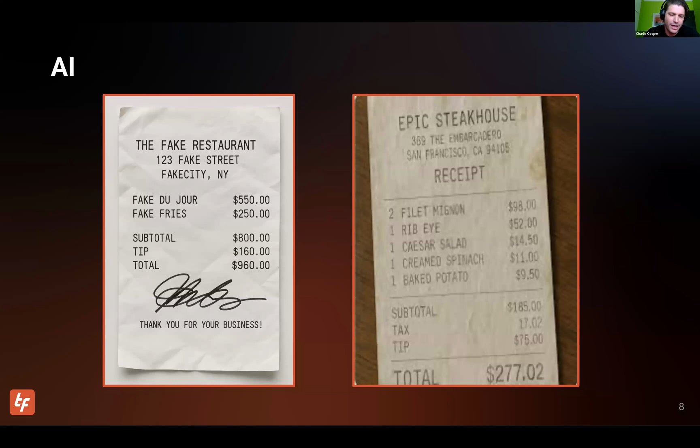And then there's the weird stuff that we're seeing, right? This was one of the first things that came in, the Tom Cruise deep fake. It wasn't malicious per se, but I think it was a little bit scary how easy it is to duplicate a celebrity's likeness and make them do weird stuff. We've seen recently some fake receipts, so fake receipt gate that's giving finance companies some headaches, and retailers are getting really scared about return fraud being prevalent.

And then I don't know if you've been on LinkedIn any time in the last couple of days, but this is the trend. You're not cool these days unless you create, for some reason, a fake action figure of yourself and post it on LinkedIn. I don't know what the business application is for this, but I think it's super cool.

So if you're in business, if you're on the webinar today, you're obviously part of the societal debate about AI. You're probably in the AEC industry. And whether you're investing in, designing, or building different projects, and you're thinking about ways that you can leverage and incorporate AI, we want to encourage you to perhaps think about using AI to help lay out and count parking stalls, right? Why? Parking drives a lot of the layout and the output of a site in general.

It's inherently a math problem that is much better suited for a piece of software than a human. Parking stalls take up a lot of space on a site itself, but they don't generate big profits. And of course, if you're doing parking or anything else, you're probably drawing these by hand with 2D tools, manually counting those parking stalls. And then of course, a customer or client needs a change and you have to redo the whole thing.

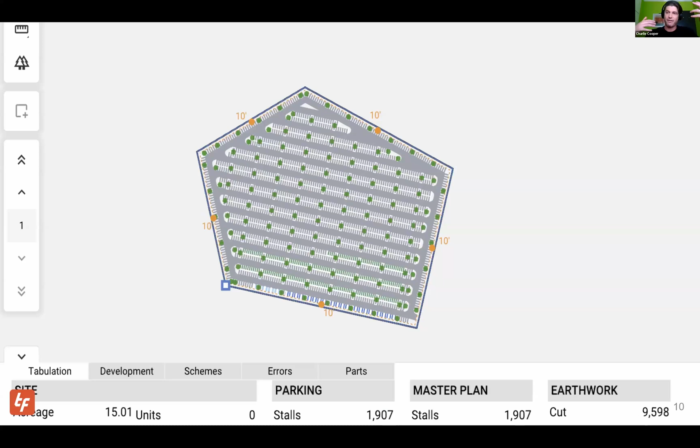Ryan Griege was developing video games at the time. So when you see TestFit today, take a look at that sort of marriage between an acute problem, Clifton's industry expertise, married with Ryan Griege's aesthetics and quick transactions in software.

If you've been following TestFit the last couple of years, we do a lot more than just parking, right? A year and a half ago, we developed a configurator or building typology for data centers. That's become our largest growing revenue driver in the business, I would say. We added a very simple massing tool, subdivisions, industrial. We've always been really strong with multifamily, whether it's high density or low density. But if you go all the way back to 2016, we started with parking.

And myself, Ben, Matt, it's been fun as TestFit has evolved and we've learned how to market, design, develop and sell the product. We're taking those learnings and we're going back to the starting point in regards to parking to try to figure out, adding new features that we've always known existed, trying to find new use cases, et cetera. And that's been really fun.

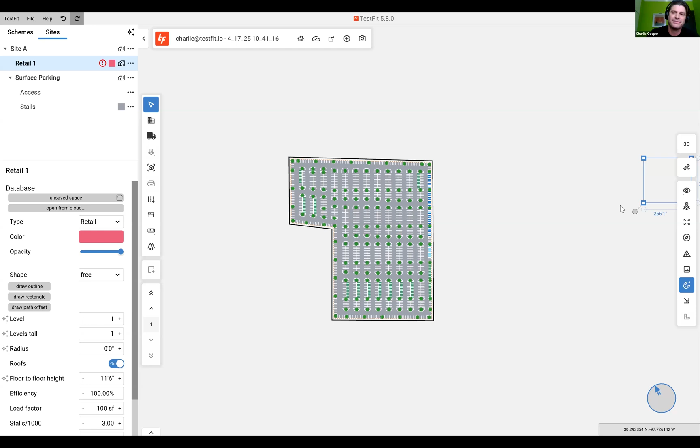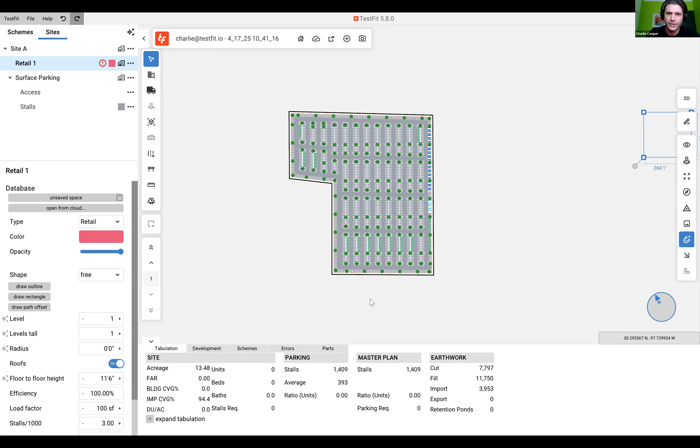Are we seeing some results come in? Awesome. Okay, so we're going to figure out who the winner was. I will show you that the actual total for this is 1,409 stalls. Right. So I'm not sure how you figured it. Maybe you have some legacy knowledge about parking stalls and the size, et cetera. Maybe you're doing some math.

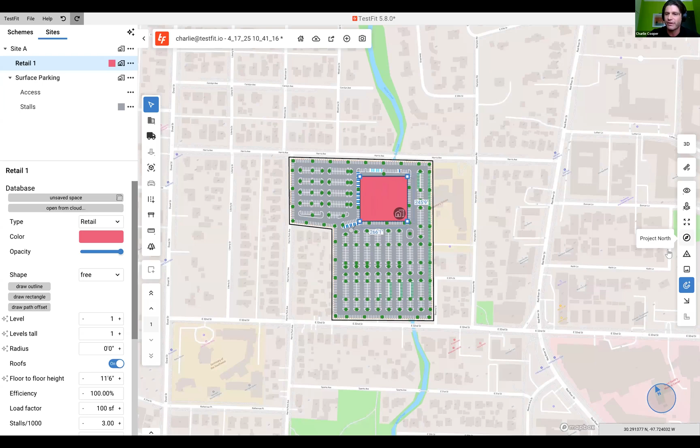Let's do another option. Let's say that we have 1,409 stalls. I'm going to hide the tabulation again, but your client needs some sort of change and wants to look at a retail pad. How many stalls now? This is something that happens in the industry all the time. These are design changes. How many stalls are in the site if I turn on, let's say, FEMA flood zones? How about now? So I'm not going to keep beating a dead horse. I guess what I'm trying to get across is that it's really difficult to count parking stalls. We might as well use AI to be able to do that for us, right?

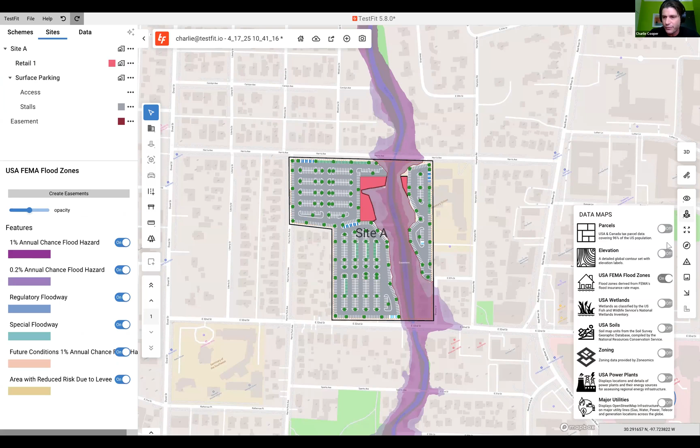So thanks for that. Do we have someone talking here? I heard some feedback. No?

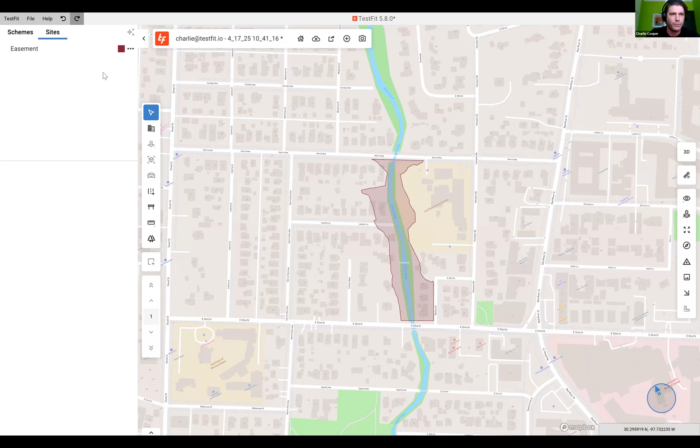Okay. Cool. What I want to do now is give you kind of a brief overview of how TestFit works, and then I'm going to hand it over to Matt to do some more complex stuff. So I'm going to turn the screen down and I'm just going to draw a blank site. I know there are probably some users on the call and maybe some people that are new to TestFit. So I'm just going to explain on a super high level what our parking algorithm is.

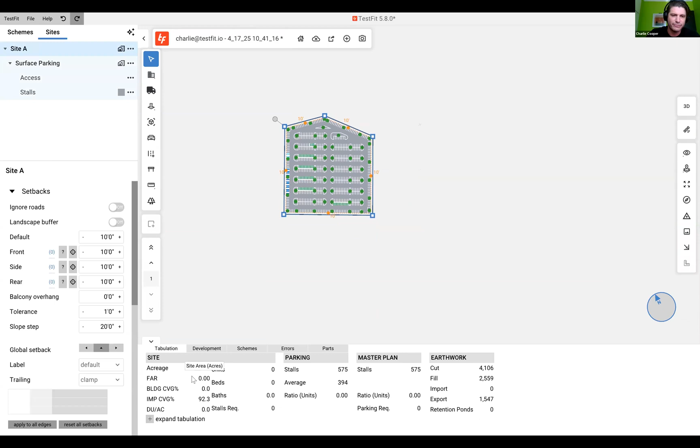So here we have TestFit. I'm going to turn on my tabulation. I have created a random 5.64 acre site, and I can, of course, change the size of it. And I put in a preset that's called surface parking.

Okay, so what you're seeing in TestFit is my design space in the middle, my editing parameters for the parking on the left, and then all of my tabulation and my counting here on the bottom. And so as you're seeing the demo today, everything is live inside of TestFit as I make changes.

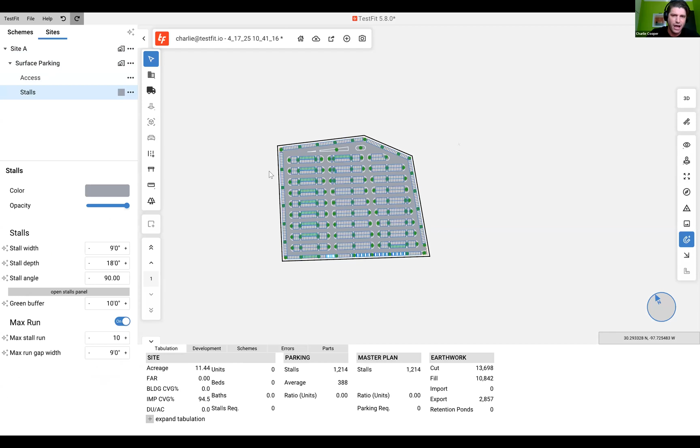So I'm making an obvious change to the boundary. I can come in here and manipulate the setback. As I'm making these changes, you're going to see that the parking is being redrawn and the stalls on the bottom are automatically updated. How many stalls depends on a couple of things. It's the novel geometry of the site, plus that 10-foot setback all the way around. And then, of course, the parameters for the parking. Stall width, stall depth coming in at 9 by 18 feet, pretty standard, drive aisle width 24 feet, et cetera, right?

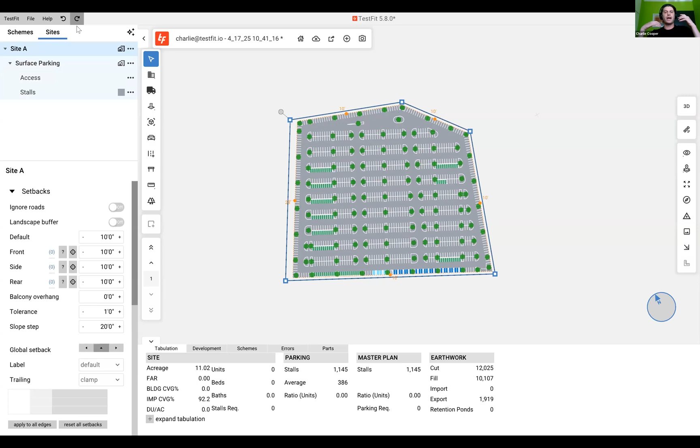So the simplest explanation that I can give for TestFit as it pertains to parking is we generate a site plan instantly using algorithms, and then we pull levers and switches to get it to reflect the outcomes that we need. And as we're doing all of this live inside of TestFit, we're getting the accurate stall counts on the bottom. Very, very simple stuff here with the surface.

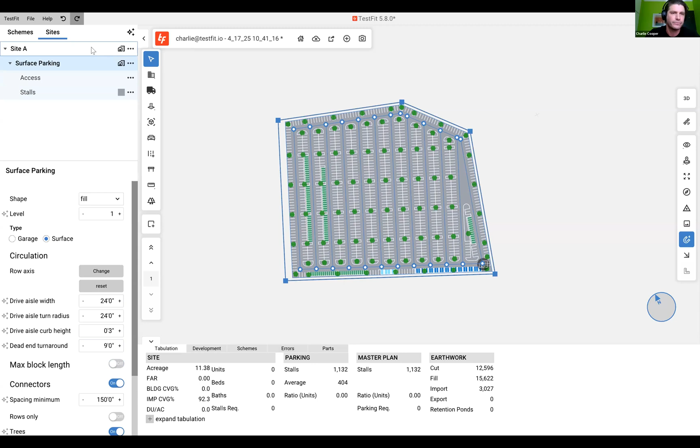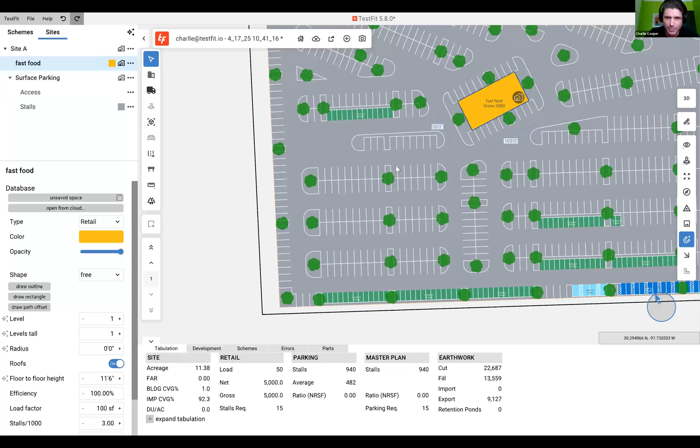We can add some complexity to the site as well. So what I'm going to do is I'm going to add a space. And we have a bunch of preset spaces in TestFit. You can create your own. We're not getting into corridor widths or unit dimensions at this point. We're just putting in a mass, right? And this mass has some metadata in regards to it, right?

So it's coming in at the first level. It's 1 level tall. Of course, I can change that. We have a couple of bits of metadata for this mass in regards to efficiency, load factor, stalls per thousand. As I'm adjusting these parameters here, you're going to see all the information on the bottom adjust as well.

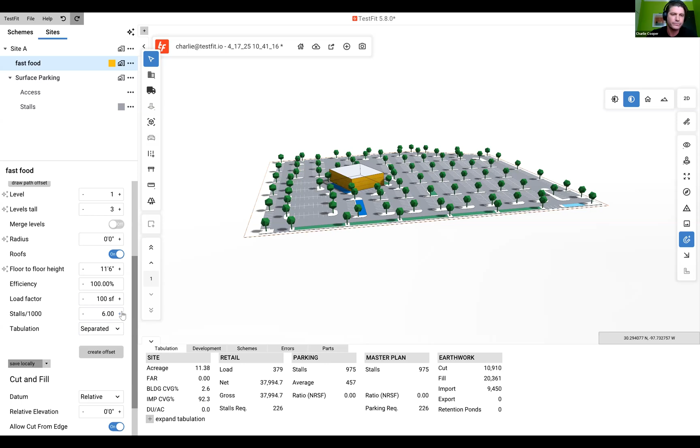So this is just a basic overview of how the TestFit parking works, is that we create a site, we put in a preset. That preset has specific parameters that define the shape, the dimensions of the parking. And then as we make changes here, we are getting accurate totals here on the site.

Matt, anything I forgot about this, or would you like to take it over? No, this is good. Can you actually place that back in the middle? Yeah, just like that. Can y'all hear me correctly? Okay, it's cool. There we go. I can hear myself now.

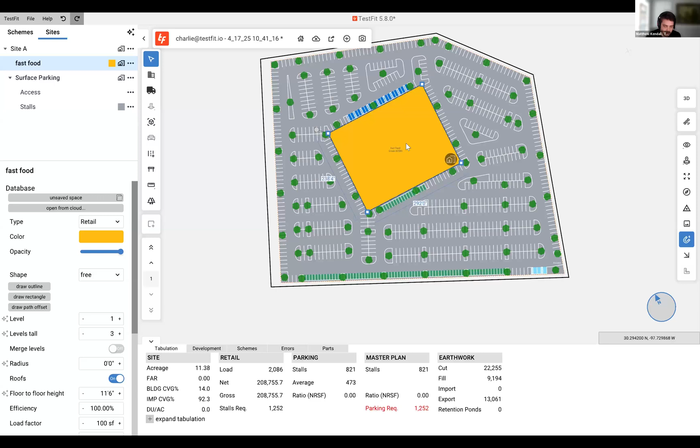Yeah, so there's some actually cool stuff going on right here. And Ben can talk about this for days probably because he spent months on this. But if you actually take a look at what's happening, I'm trying to pull up my pen. You're gonna notice there's these kind of connections too. This is a new addition that we added to our parking, and you're gonna notice some areas, like this one over here on the right, we can see that this connection isn't made over here. So something that's really nice that our parking's now doing, and that's fine, Charlie, we can leave it there. It'd be a good piece.

So what it's doing now is you can see we've created these sub-regions of parking around an area, but we're still keeping that larger circulation path happening on the outside. So you get these nice drop-off-esque areas. Besides right here, that's a connection that you can change. These are all parameters that you can adjust. We call these our connections between those parking zones.

So if we wanted to, we can turn those off, but it is kind of nice how you're starting to get these subtle, smaller, lower trafficked areas with that larger ring road on the outside. I think that's another nice big improvement that we have from our parking algorithm that Ben had worked on for such a while.

Awesome. Yeah, and before we hand it over to you, Matt, and I think Ben, since we have you on the call, you were the first one, after Clifton and Ryan first came up with this parking algorithm, to do the research on the industry and what was available at the time. How did you even start to think about developing parking and what did you learn early on?

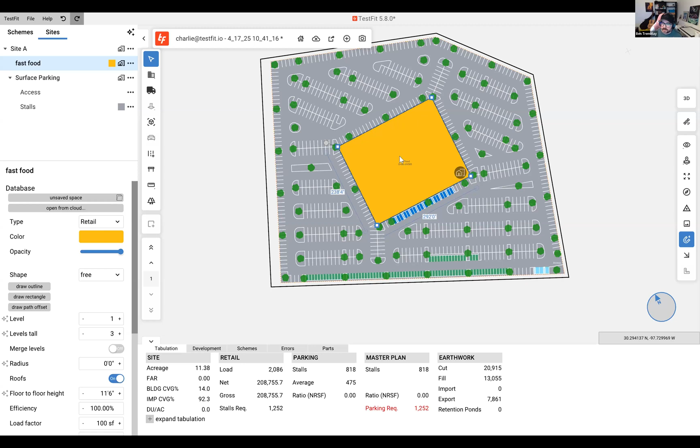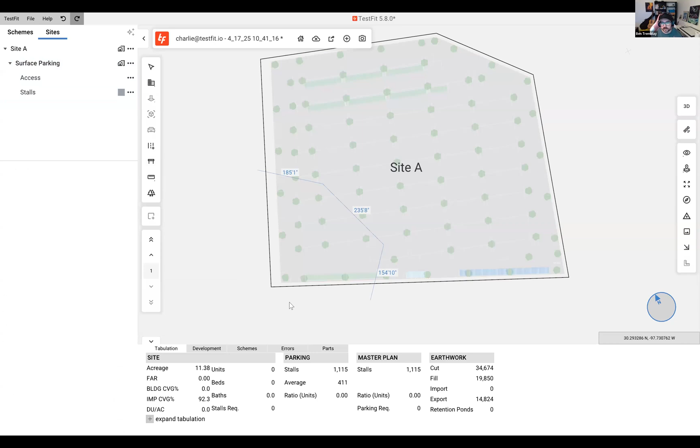When I started, the first thing I did was try to figure out what other people were doing, because there are lots of other really smart people working on these kinds of things too. What I found is anyone working on this, or at least with any public research or write-ups, either approached the problem strictly from looking at the circulation and not really worrying about how to use it, or they looked at it as having already fixed circulation and what to do given that. So I think we're actually doing something novel, which makes it hard, but also really rewarding and exciting to work on.

With that said, how did I do it? There's a lot of iteration. There's definitely some things that didn't work initially, but as we iterate on it, we get better and better. I don't really have a better answer other than that. It's just you try to come up with an idea that will work or give you good solves, and you build it, and then either it does work or it doesn't. Sometimes it doesn't work, but we're definitely getting there.

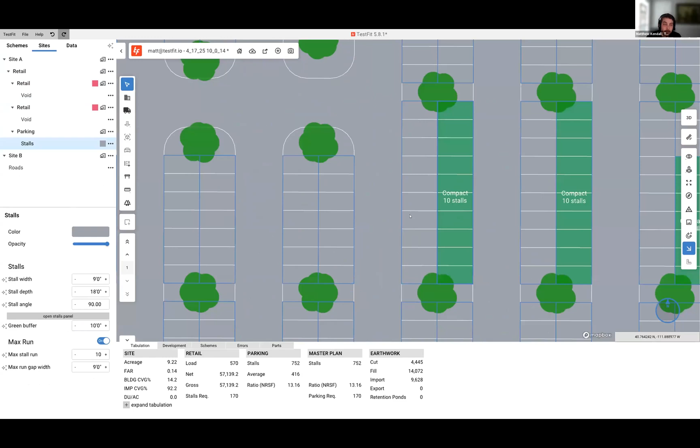Okay, so as Charlie was mentioning, we have surface parking, and we're seeing it resolve around there. As mentioned over here on the left, everything we're seeing is a parameter, so your stall dimensions are in there. We have a couple of different colored areas in here as well - we have ADA stalls, van ADAs, and compact stalls. All of these are parameters that you can change, just like the standard stalls. You can also set if you wanted it as a percentage - right now we have compacts at 10%, or if you wanted, we have this nice table you can have that follow, or have it follow that one to place that parking for you as needed.

So as he was showing, as these adjust the number of stalls that are placed, the number of custom stalls placed is also adjusting as well.

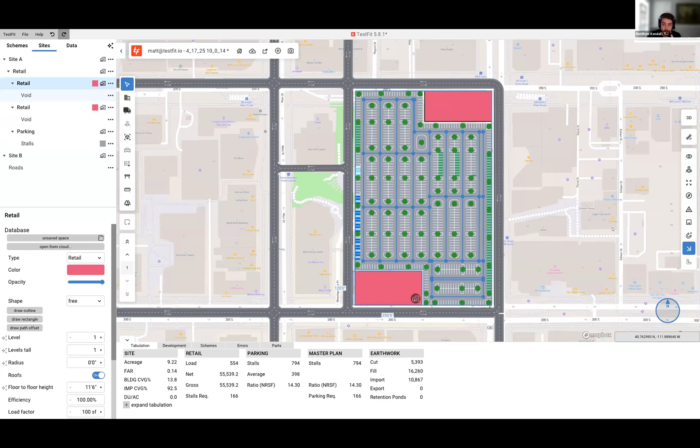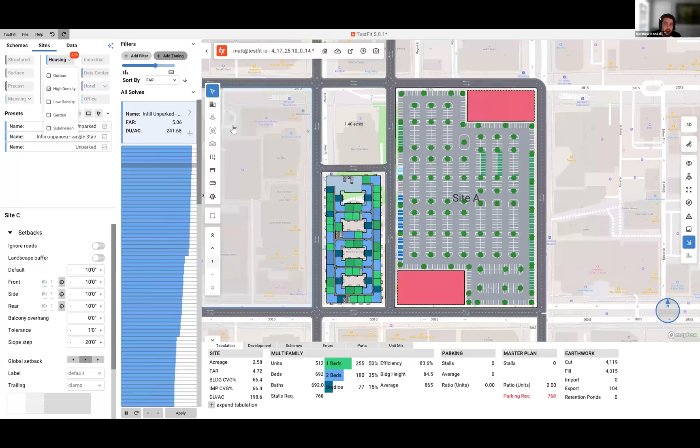Moving over to this site - so what we're going to do is, I'm in generative design right now, and I'm going to turn on our high density solver. We're seeing it go through all of these options right here just to see how this is solving. But for this one, we're actually going to go back to our wrap, which was one of our first parking features that we had.

So we'll go down to this wrap. We can take a look at this in 3D - so what's actually happening here? We'll take a look at the garage, see how this is functioning. We can see within the garage we do have ramp placement happening. Because this garage is so short, it's having some trouble placing one singular ramp, so you can see these ramps are all being moved around. We also have an access in here that we can drag and move around - wherever that access moves, we can see where we're removing streets to create that connection over there.

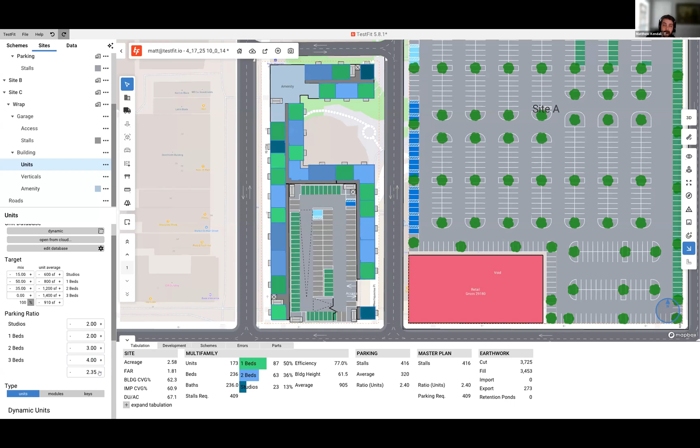Another important thing is, let's say we're creating our building and we need to input our stall requirement for these. Right now we just have a generic 2 per each, but as this starts to increase, we're going to see that our parking garage itself is growing to meet that demand. So depending on what your stall count is that you need for this - I'll start filling these in - that demand, we can see the total of it, and as that grows, that's going to be reflected in the size of the garage showing up on here.

We do give you options to move this garage around as you want, so I can click and drag this to another location, and we're going to solve it somewhere for you. You can see if I cross over the lines, it doesn't like that because we're technically moving outside, but you can see you have quick control of where to place this.

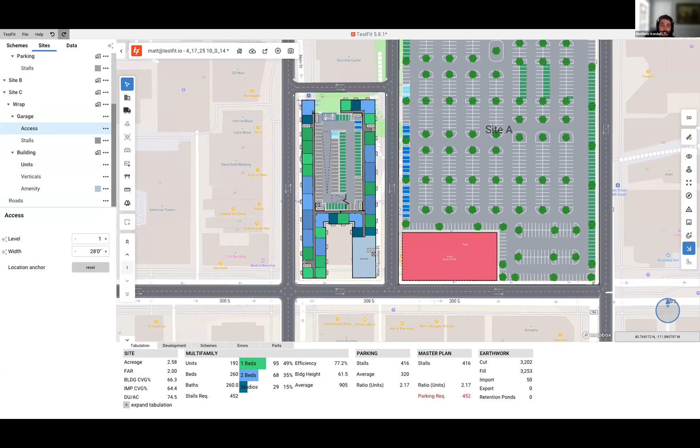I can put this in here, in this corner. I can move my stall to the front after I move my ramp. We can see you have options to either hide that parking from the outside, like what we're doing with this wrap, or expose it if you want by just dragging that up on that edge. Just showing that you can customize that a bit.

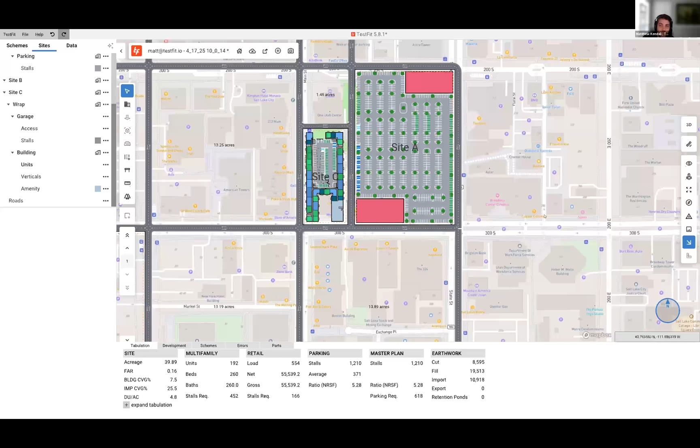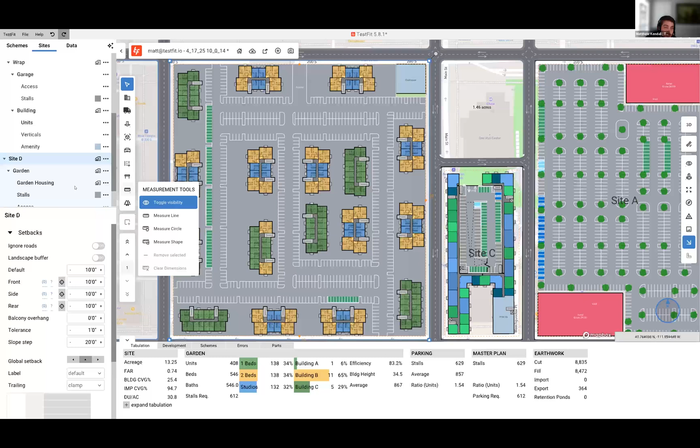The next piece I want to show in terms of parking is over here, our Garden solver. Garden is going to be our one with our prototypical buildings, and it's also trying to hit a mix like we're looking at with the other one. Let me turn on some green spaces real quick. We're going to fill these gaps that we have with this.

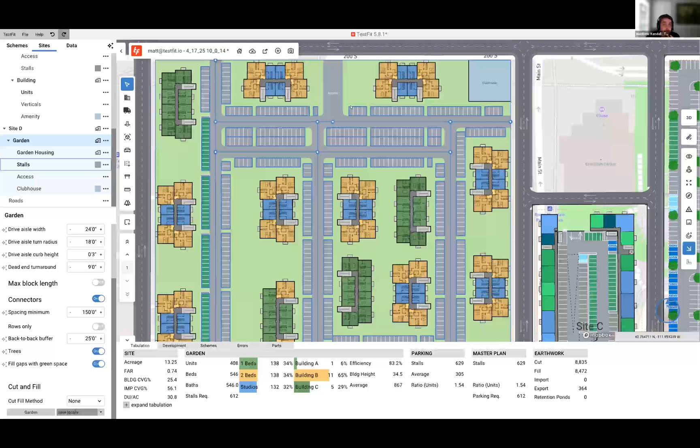With parking as well, we're going to notice we're seeing a couple of these gaps show up in here. That's also another parameter that we have. Lots of times when you're working on these sites, you're required by zoning or whoever it is to place a landscape buffer every certain number of stalls. So we have that set inside of here. I've changed my max run to 20 stalls. Now TestFit is running 20 stalls and placing a landscape buffer over there, or just a gap - you don't have to landscape it.

We can actually have a toggle to undo that one. So just to show, you can go in there, make those changes, set those requirements that come in from the city, whatever it may be, and we're kind of seeing how that's updating.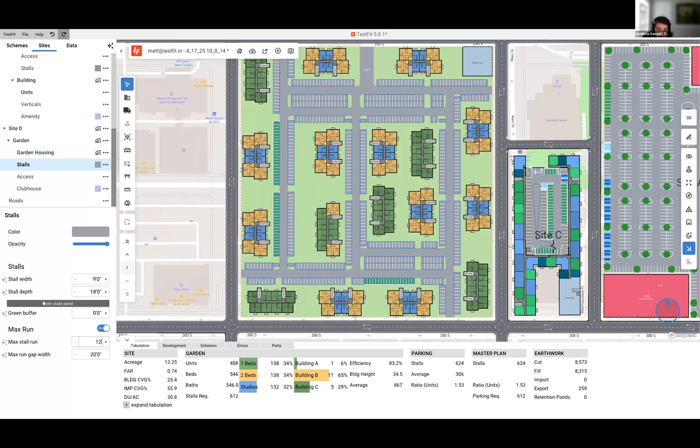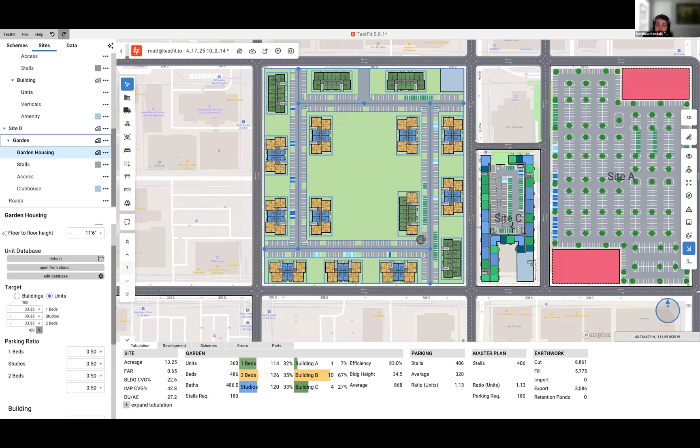This is also doing something very similar to what the wrap one was doing. I have a parking requirement for my site. If I start to lower this, notice we have a couple extra rows of parking outside of this ring road and this one going down the middle. If I just lower my parking down, notice how there's no other roads being placed other than these outside larger circulation spines. As I increase this, there's going to be more and more parking until it just tells me I need to park the entire site. So it's updating to the demand that it's requesting.

On top of that, let's say we have an idea of how we want to park it, or maybe we want to fine tune it a bit. There's a way to go in and start to manually adjust this. We call this our manual mode.

Notice as I start to draw these things, the buildings themselves are reflecting the update to that parking, and they're changing as necessary. So if there's enough room, I'll draw another area down here lower. We're seeing that the buildings are still showing up, but we're also getting that parking, and we're seeing that max stall run show up on there as well.

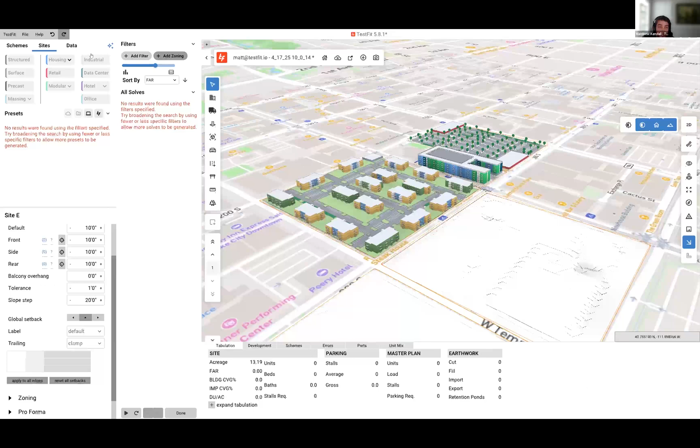Go over to Gurban - that's our, we'll get into 3D so we can take a look at all this. So that's going to be our Garden one. Gurban, we have another one. It's a similar kind of lower density style development. We'll see what that looks like as well. Also kind of a much larger site.

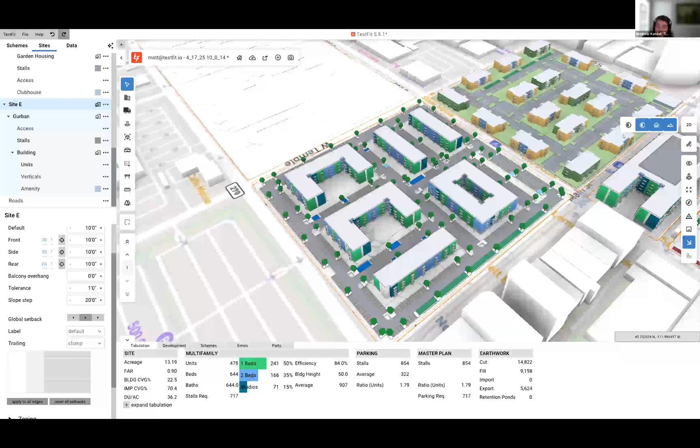So you can see down here, we're looking at 13 acres for this larger site. It's again placing all these buildings. We have parameters set in here for kind of size of courtyard versus size of the building. You can see some of these are open and some are closed or just straight segments. But again, this is doing similar things to what we're looking at with all of them.

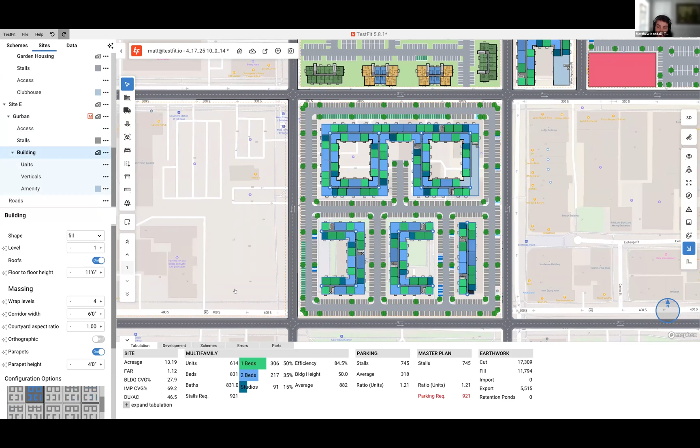That parking demand is such a big factor into how these sites work that we're solving that for you, and then we're giving you the option to go in and adjust that manually afterwards. So you can see as I start to remove rows of parking, it's opening it up for it to be a larger building or a larger mass. Then you have options over here on the left to cycle between different ones. At this point, you've kind of taken over for the parking demand meeting it, but still we're giving you that first solve that is hitting the parking requirements shown down here on the bottom.

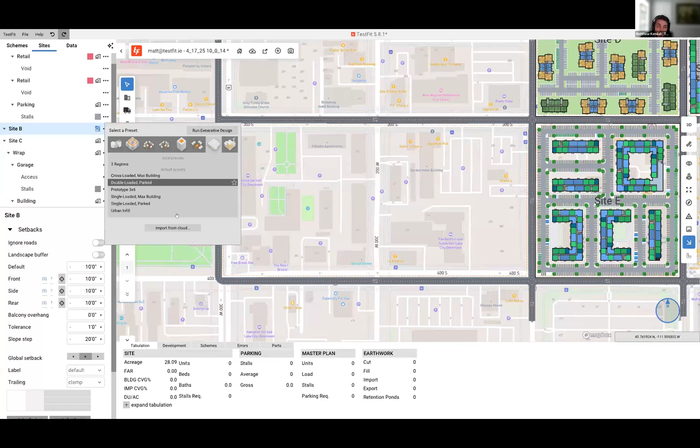Just showing off some of those other features that we have within some of those other configurators. This last one I want to show, we're going to move up in scale quite a bit and look at our industrial solver. Big, large, cross-loaded building. Very similar to the other things we've been looking at.

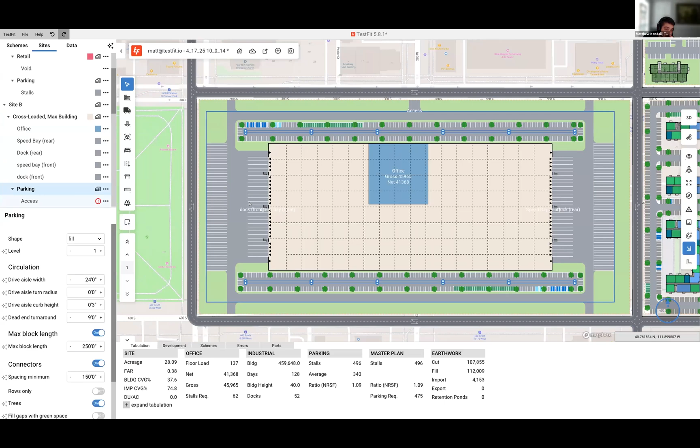This not only has parking along the edges, which is more for standard vehicular car parking, but the office has a demand for parking too, so I can increase this up or down as needed and it'll place the parking. On top of that, we also have dock doors. If you're familiar with industrial, lots of times you'll have parking opposite of that dock door, and there's a requirement for that.

This is another parameter we have inside of TestFit. If I lower my parking required, we're seeing that shrink. I could say it's zero, and it disappears. Now the building's actually grown because it doesn't allocate that leftover space for parking on those edges. As this is increasing, just like all the other ones, we're adding more parking to this building until it can't fit anymore, and now we have parking for both of these setups.

One thing I started out with here that I haven't shown yet is this larger road network that I use to create these plans. The road network itself is what's being used right now to create the outlines of the site. Let me turn off our background real quick, and that road network itself can be customized as well.

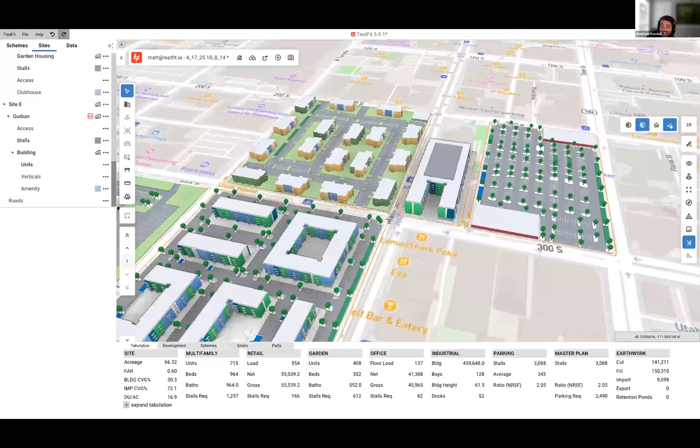What we're looking at here, I'll select our roads. I've just drawn this basic alley that we have over here. Our roads tool allows us to, as you can see, it has parking in it, so we can actually customize these sections. I can left click inside and change my parking stalls.

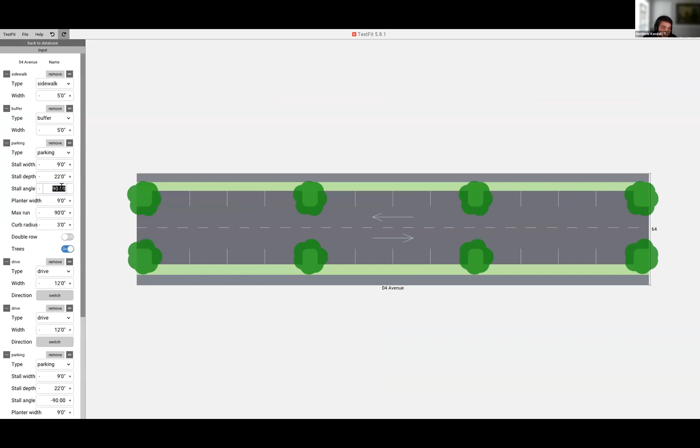Maybe I don't want these ones, we'll turn that to head-ins on both. So you can see, you can go in and customize them, change the stall angles, sizes, and depths. These are all parameters that are there for you to use. And I'll go back to those nice parallels.

So we can see that this avenue over here has parking. Once I've already drawn all of this road network, I can right click, change this type, and we'll go to avenue. If you notice, as I did that, it's taken up more space within that street section, and all of these sites have adjusted to hit that.

And I'll do Control Z. We can see it's gone back, notice the edge line where all these are. And then I go back forward, they've all pushed back, resolving the requirements they have, the tabs that they have for the units, and all of the data that's involved with that.

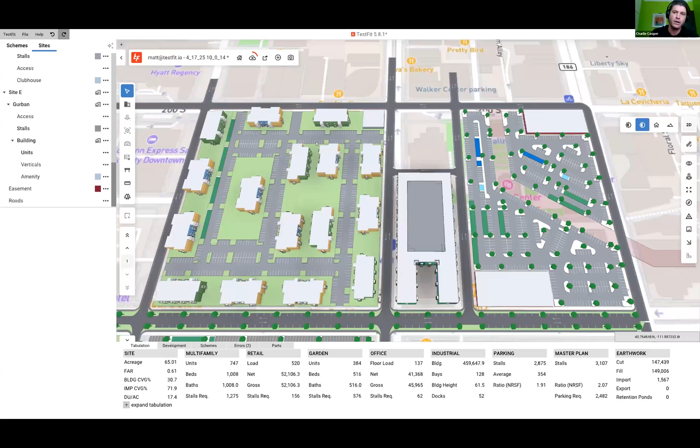Yeah. There's a couple more coming in and I'll ask a couple. So is this compatible or exportable to Revit? The short answer is yes, we have a free add-in to Revit. It's a plugin that runs natively in the ribbon of Revit. A bunch of our customers are spending a couple minutes inside of TestFit, creating geometry, and then exporting directly to Revit to continue on. And then another interesting question here was, does this conform to contours? I'll let you take that one, Matthew.

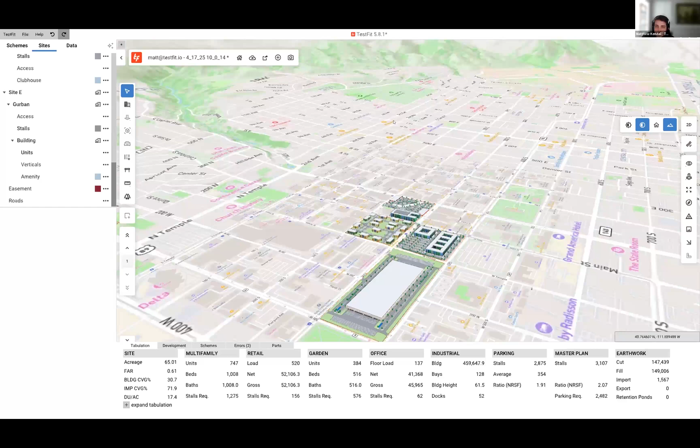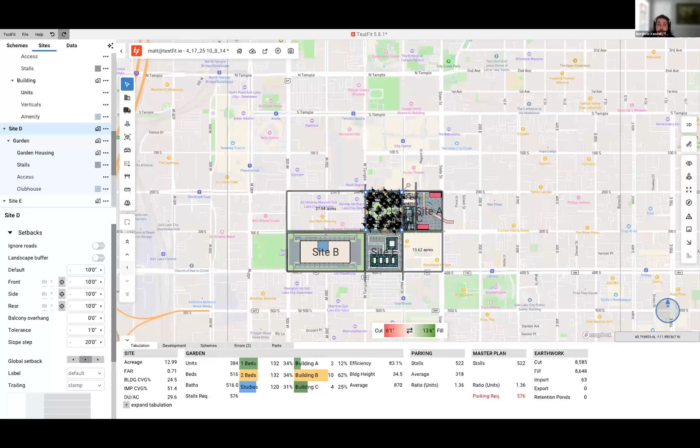Oh, it does. I actually have those turned off right now. There's a hilly area back behind us. So what I'm going to do is turn on my cut and fill metrics. I had it toned down a bit, and we'll start to see how this looks. This is not the most curved area, so let's draw a site up here. Actually, we're going to use our define by parcels. I'm also going to go on this right side and turn on some of our data layers. You can see parcels have popped on because I've enabled define by parcels.

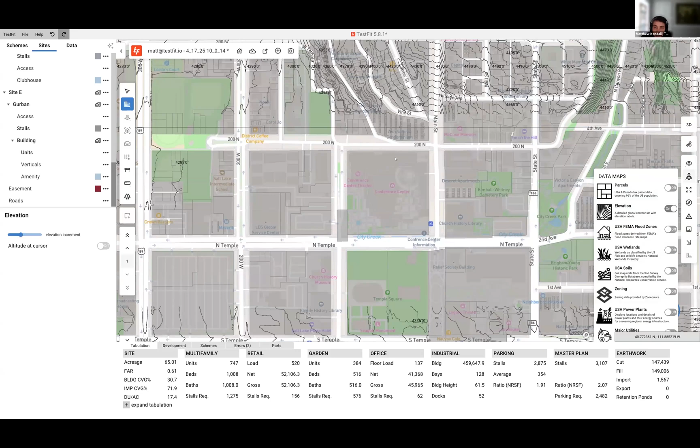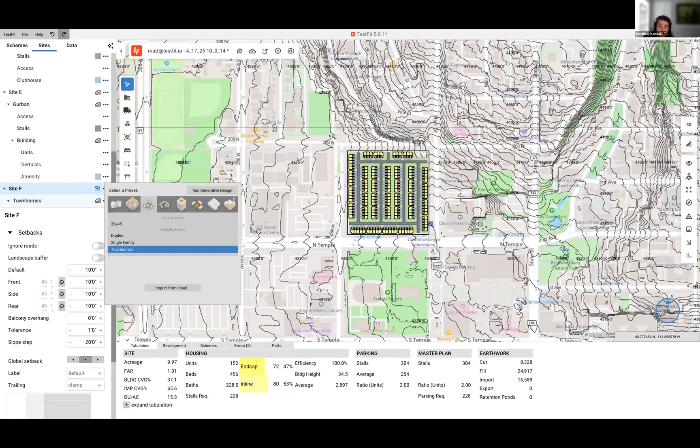I'll toggle zone. No, we won't do zoning. We'll do elevations for now. We're not in any flood zones. Oh yeah, we're seeing way more topo over here. So I can just click on here. I've defined by parcels. And let's say I'll put a low density development on here, so some townhomes. Now that the townhomes have been placed, we're going to give it a second and pan into 3D. And now we're going to see that it's actually reacting to that street that we have.

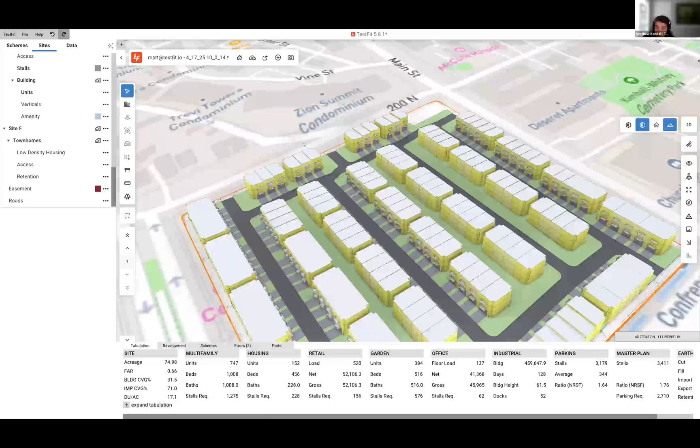So it's doing a few things. I think I'm on the latest one. We actually have a new update coming out; this one's looking great, but it has some new features. So this is responding to topo. We can see it kind of stepping down. If I go back into 2D, once I select inside of that site, we give you spot grades for where it's connecting to the outside. And we can see where all of these intersections are and how that's reacting with the roads. So we're creating a slope from intersection to intersection, and all of these are editable as well.

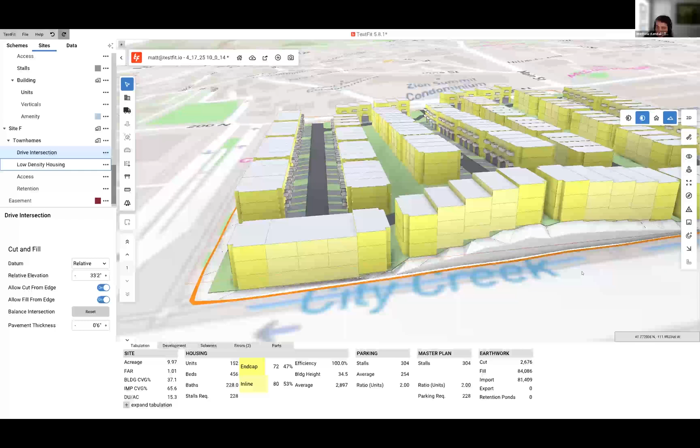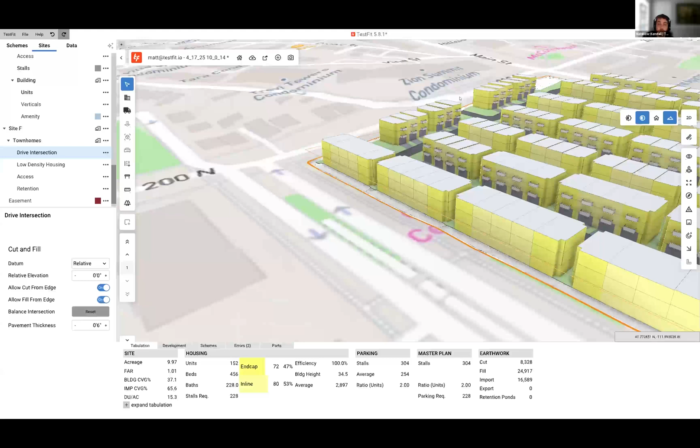So if I wanted to bring this to, let's say, 4350, it's going to be way up on purpose. Now I've raised up this side and we can see that they've all reacted to that, and this outside area, we can see that large piece that it made. You can reset these if you want to. So I've set that back to normal and it's all looking just as you would expect. It is placing the townhomes off of that road with a certain slope in mind, so it can place it within a reasonable distance of that road, up or down a certain percentage. So yes, it is going to be responding to topo. On top of that, we can give you those cut and fill analysis down here on the bottom.

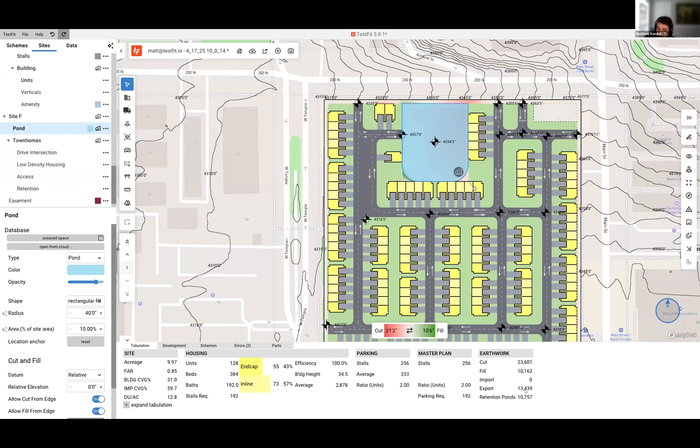If you have other things on the site, this is kind of a slope site, but just to show a bit more since you asked the topo question, I'll add a pond to this site right now for fun. And what we can actually see is we're getting those topo changes down here on the bottom. We're seeing what those are. We're also seeing how much area is within that retention pond that we've created. But again, we're seeing all this happen instantly.

So as I drag this pond around, let me make sure I can grab that pond. Oh, I can't drag it for some reason. Well, we can just kind of take a look at those lines. So as I move this, we're seeing all of those spot grades update instantly, and you pan into 3D and you're going to see that instant response as well for how those are moving.

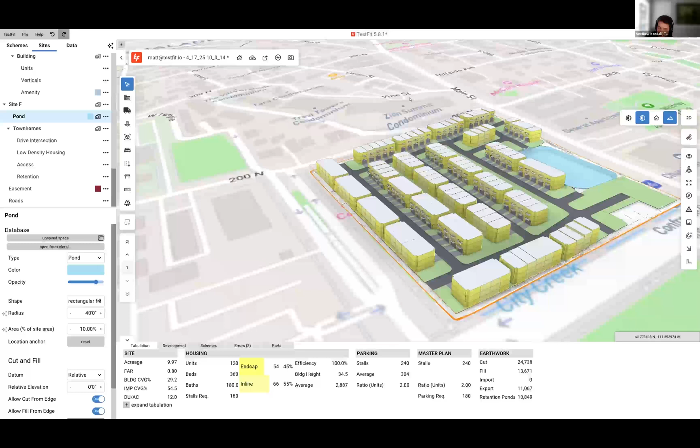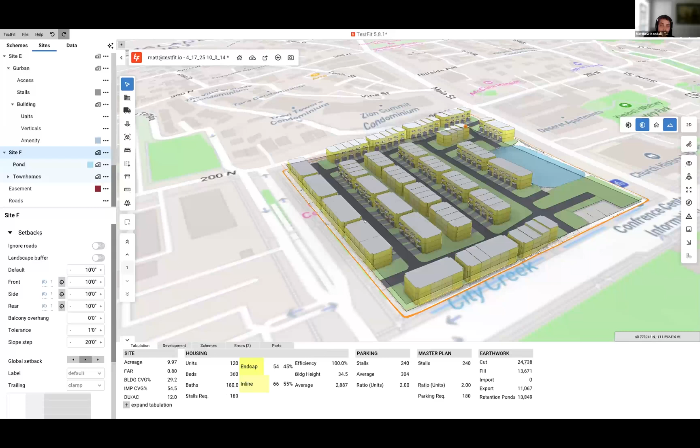Hopefully I answered that. So yes, we do have topo. We are kind of accounting for that when we're laying out these buildings. And then you can see you're kind of getting the instant feedback when you're adjusting these to the topo and how it's siting those and placing the finished floor elevations for everything.

Cool. Awesome, Kevin. What other questions were coming up? Couple more questions. One is in regards to underground parking. I'm sure you have prepared a basic demo for, yes, structured parking, as well as there's a question about movement required for access stalls and docks. So if you could get into maybe some other building typologies, like structured parking and industrial.

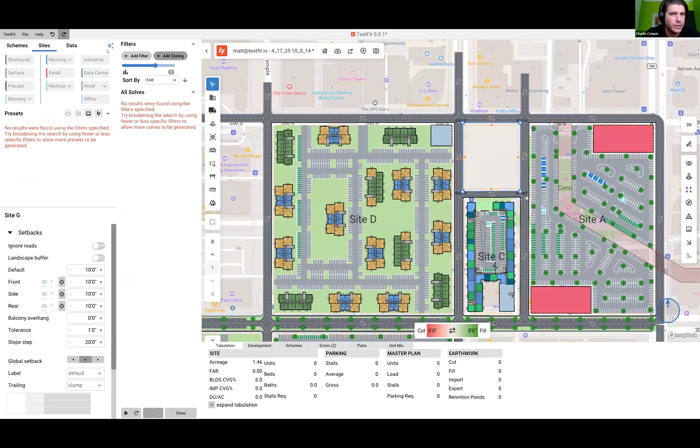Yeah. Okay, cool. So we'll take a look at the structured parking real quick. So I'm just going to do a high density podium tower. What I'm going to do is I'm just going to adjust my setbacks, get me a little bit closer to those road sections that we've created, because the roads already have sidewalks and whatnot. So we're just going to give ourselves a bit more room on here.

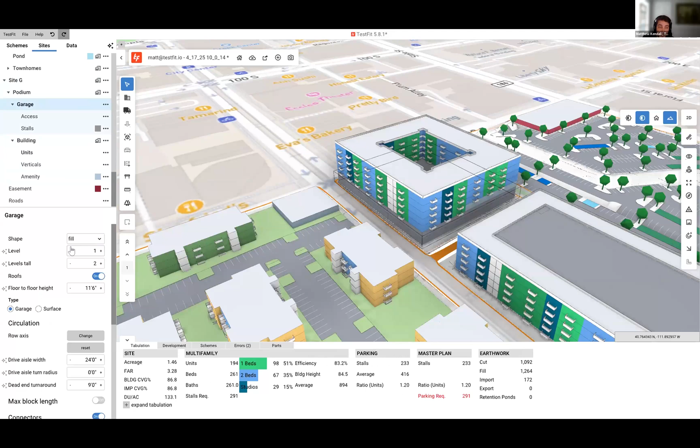So within the structured parking, it's just going to be another parameter that we have. If I want to, I can select that garage level. Right now it's starting on level 1. I move it down to basement. Now it's starting in the basement. Move it down again. Oh, clicked wrong button. And now it's completely in the basement.

So yeah, there is an option to go and create basement parking. We're just saying how tall is that garage. Right now we're showing 2, 3, you can change those as you want. And then that starting point for that as well. So yeah, we will have that.

Another thing that we'll notice within the parking garage, as I didn't mention it too much, is we are kind of leaving a column buffer for you. So selecting that garage layer, I can go to where we have our columns. There we go. And so those are actually being placed, you can see a certain distance, and we're trying to kind of match those up along there.

The columns right now, they don't coordinate with the stalls up above, but we are trying to coordinate some of these verticals moving down into that garage. So that's kind of our start of our coordination of those. And so let me go over here to the left and let's see where our spacing is. I'll just turn our column buffer off for now, just for fun.

So you can see no gaps for the columns are being placed, but we're seeing these stairs start to kind of come down in there. And as these move around, if I wanted to select these and drag them around, we should see that start to reflect within that garage. And you can see that showing up down there for that garage as well. So yeah, we have that.

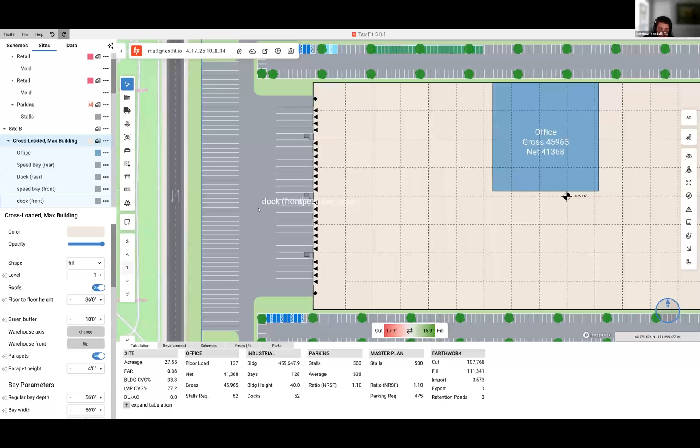I think another question came in about some other pieces of parking. So what I wanted to mention about industrial as well. When we're doing an industrial solve, this actually works for any of the solves. But what I'm going to do is, we do have this little truck icon over here on the left. What this is, you can actually see we're showing a big semi right here.

I can click tab and I can cycle between different ones. We're using kind of just the basic standards. So we have our semi, we have a bus, and I think we have a fire truck, a smaller van, and then just a regular car on here. So there's a few options that we have.

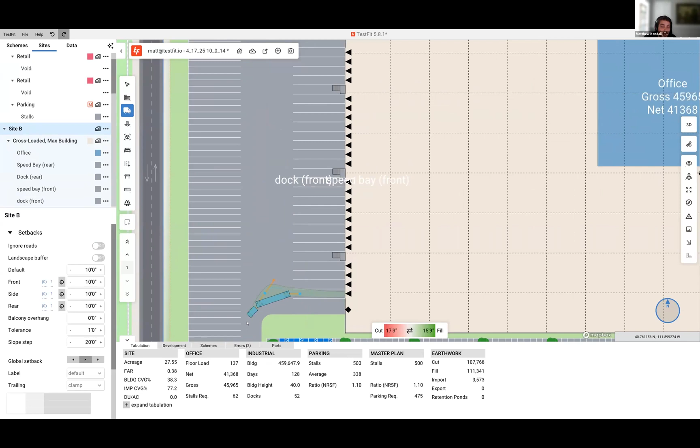The way that it works is, one, we kind of click. So now I'm kind of backed up into this area, and we're manually drawing it right now, what that's going to look like and how we're getting out of that site. So we can see I just kind of clicked that. I can finish it if I want. And now I can see that turning line.

If I were to select it, I can kind of see how that looks. And also I can make adjustments to the angles and sharpness of how these are turning. So right now it is kind of a manual condition to draw our vehicle path. But you can see once you've drawn it, it stays there and you get to see how that's working. If it's too tight, we can always adjust turn radius.

We can adjust the path that it's taking, see if it fits. Again, this is all just to help check your work as you're going along. We're required to have those turning radiuses for those trucks.

Cool. Great questions. I see a couple more, Charlie. Was there anything else that you needed to read out for me for questions? Oh, you're muted.

We handled underground parking. We looked at industrial. Where is the topography data coming from? I should know this answer off the top of my head. Esri, I think it's coming from Esri, I believe. It's Esri. Okay, cool, great. Yeah, because I know we've looked at a couple of them. Okay, good. Yeah, we have a number of different data providers. Esri is one of them.

Another interesting one for you, Kendall, which would be fun to see you do live, is what about mixed use? This person is a land developer, sometimes combining fourplexes and duplexes with townhouses. Oh, fun. Can they build my own template of asset typology? Yes, of course. So I think he said townhome with some mixed use stuff on there. So we'll give it a try.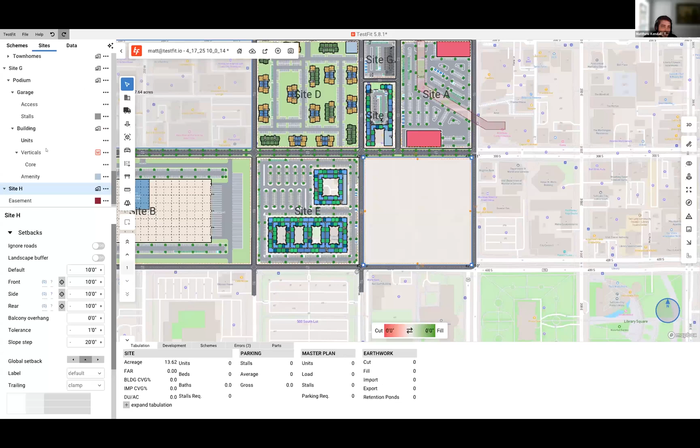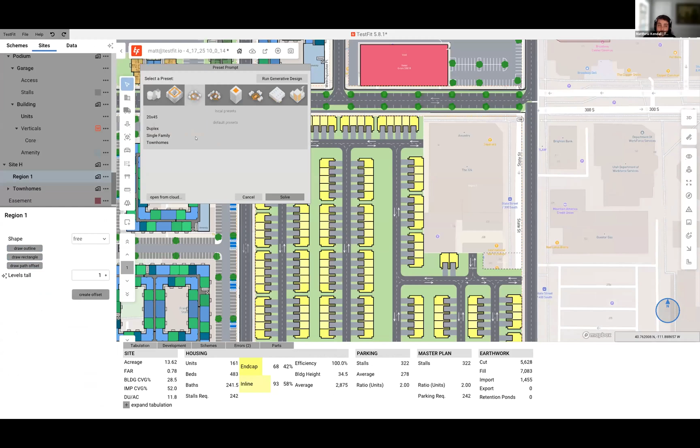So there's a few ways we can go about this. If I just have a basic townhome solve like this, we can see it's just solving townhomes everywhere. There's a couple ways to go about it. We have this idea of what we call a region. So if I were to go in and start drawing, let's say I want to place something over here within the same site, this is still kind of part of the same piece.

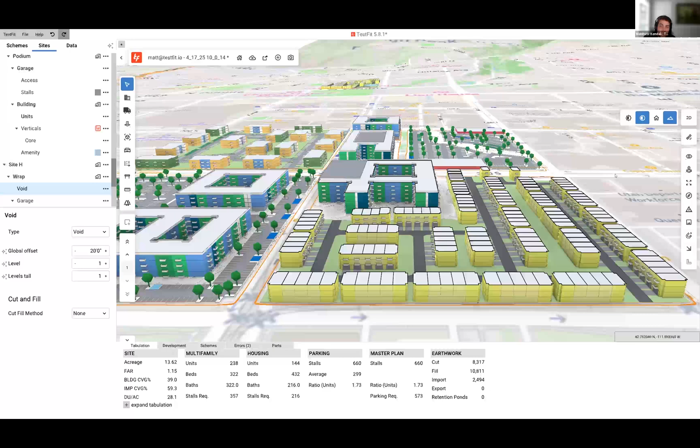I'm going to put a big, large wrap for fun. So we can see within one site, I can start to mix these different typologies together. I can right click and create an offset, give myself some buffer between these areas over here. So if we wanted to place a wrap right up next to some townhomes, very easy to do. You can see we're still putting in topo grades and elevations within there.

But if we wanted to go a step farther, let's say we wanted to update specific styles within this, we do have this other feature called dependent fill. And what that actually means is, let's say within this section right here, I want to put something else, not like what we've drawn over here, which is this manually drawn shape that I've placed. I can actually say I want to put something inside of this street block that we've just created, which is actually really cool.

So I'm going to add a fill region. Now, once I have a fill region active, I can highlight any one of these sections over here. You can see I'm hovering over and we're seeing what that is. So let's just do this one because we used that as an example. I can click inside of that. And then just for now, I'm going to put an unparked building just to show something different. But it can switch between anything. We can put parcels on there.

So now you can see I have parcels mixed with townhomes. I can put different kinds of townhomes if I want. I know they're all showing up as yellow right now, but that's just showing different townhomes. But yeah, you can essentially put whatever you'd like inside of that hosted area. We'll do unparked just so it's pure building. And then we can see what that looks like.

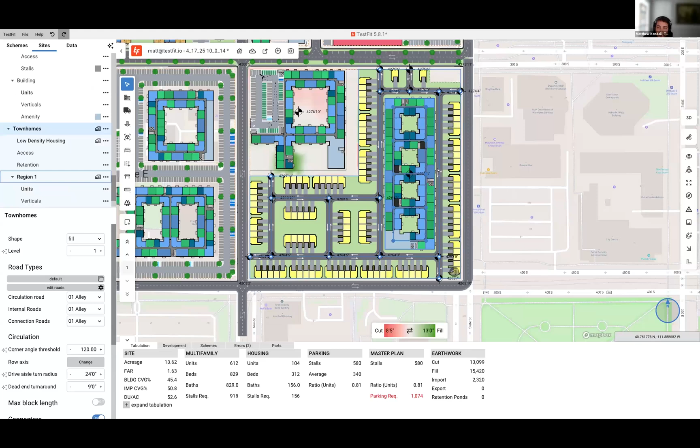And I'll just kind of draw an extra road. So maybe that's too big of an area we want, and we'll just cut that with that piece. So now we can see part of that's just taken up with parking. So depending on the level of mixed use you're going for, we can either do it mixed use as in on a site that we're looking at right now.

Someone asked the podium question earlier. If we're doing, let's say, mixed use on this high density building, same thing with anything else we're looking at. I'm going in, I'm adding a space. I'm going to move this space where I want it. So maybe this is where I want this today. I'll change that space over to retail. Now that it's retail, I have a load factor that's showing up for this. So that retail on that site is going to need about 28 stalls, and that's all tabulating over here within this site itself.

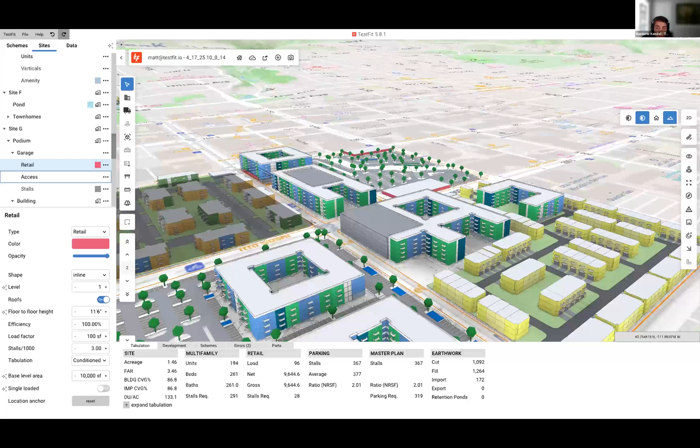So yeah, there's a few ways to go about it. You can do mixed use vertically if we're looking at a building. If you wanted to go in and start to separate these different buildings into different styles of units, that's an option. We can change units at height. So if you're looking at senior living or student housing or penthouses or amenity levels with changes, there's options to go in and change the uses or the units used on each of those sections. So we can do some mixed use is basically the TLDR of that.

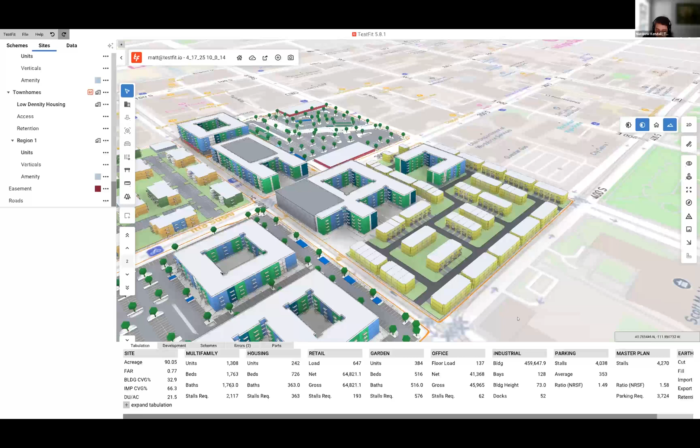Charlie, was there anything else to that question? Just want to make sure I covered all of that. I think that was good, and we can follow up with answers to these questions. Okay. Yeah. Do you have more to show, Matt? Actually, no, that's good for me. Actually, I just opened up the questions. Now I can see them.

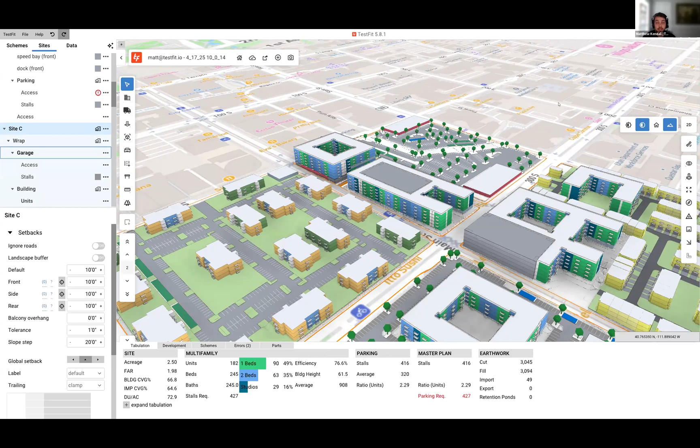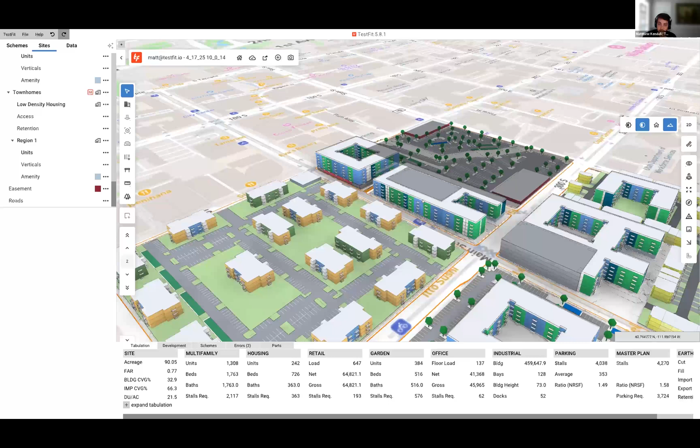I saw one thing about the Revit modification. So once it's imported into Revit, you're going to be basically importing in what it looks like at that time. So if you wanted to make changes, you would just import the updated file. It's not going to be like a live link where, let's say I come in here and I delete this and then it shows up deleted inside of Revit right now. We are importing in as lines. You can apply things to those lines, being wall types, the types of slabs or floors that you're using. All those are things that you can select when you import it into Revit, but it's not going to be a live working relationship back and forth.

Yeah, there we go. Yeah, Clifton. It's very limited, the bidirectional piece of it. There's some things that we can go in and out, but it's not going to be like a perfect live link at first.

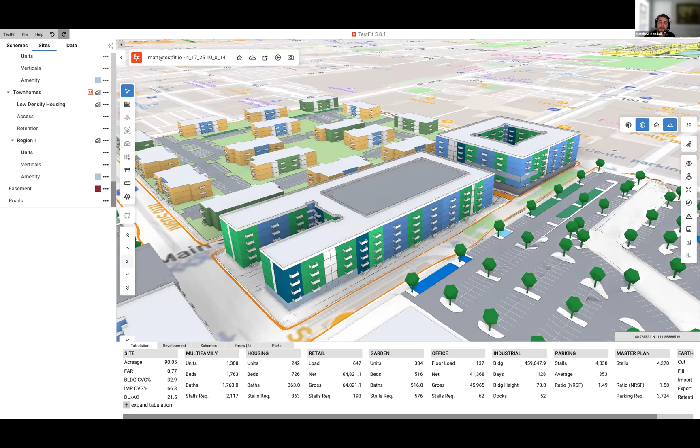In TestFit, we can export as a DXF file. It's like a basic CAD format. That is a way that you can take this out of here into ArchiCAD or AutoCAD and those kinds of things. And same thing, it'll come in with layers. We'll have lines for building profiles, corridors, the streets and the parking. All of that's going to come in on individual layers that you can then start to control.

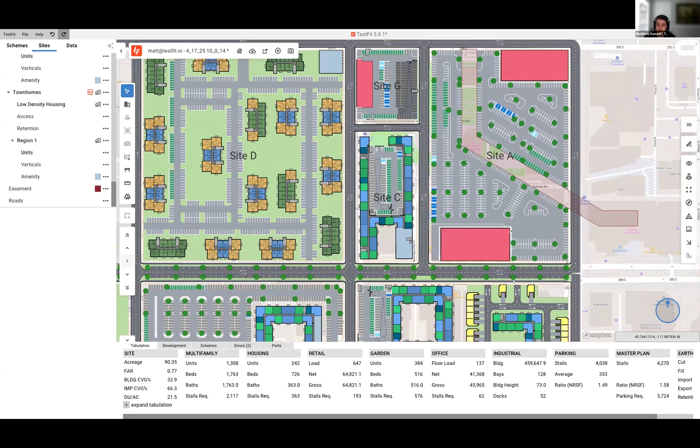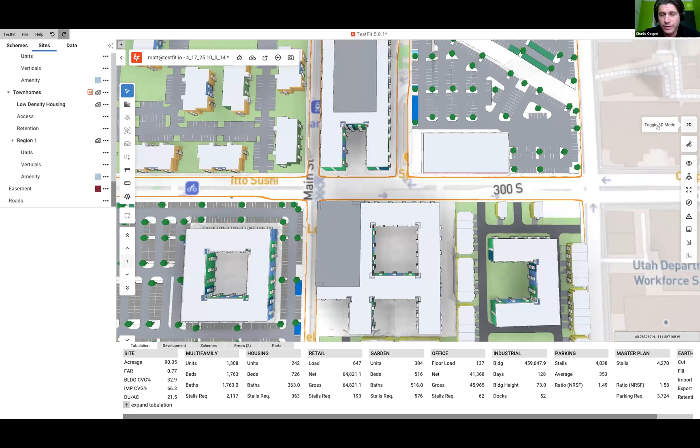Well, that's all I have, Charlie. If there's any more questions, I'm happy to answer them. Yeah, that's great. It's a Thursday before a long weekend for us, so we're happy to let class out a little early, right? I think Amazon started with selling books, right? We started with automating parking, and you can see all the nice stuff that we have developed as a result of that.